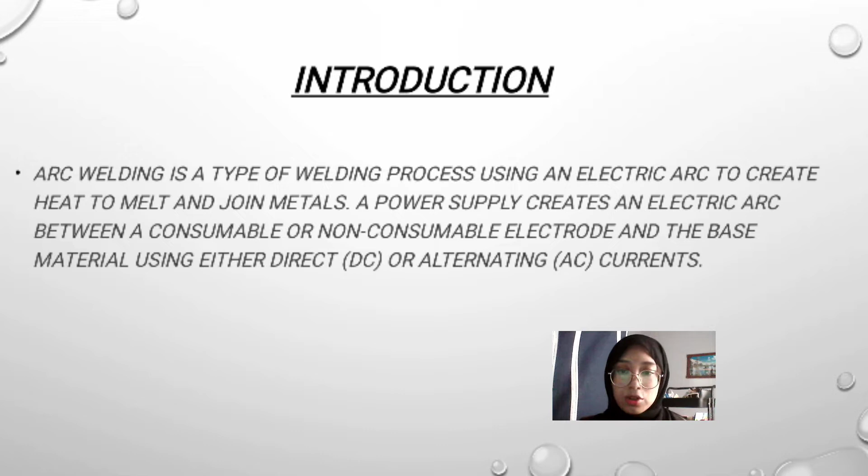This is a presentation on arc welding. Introduction: arc welding is a type of welding process using an electric arc to create heat to melt and join metals. A power supply creates an electric arc between a consumable or non-consumable electrode and the base material using either direct DC or alternating AC currents.

Objectives: to perform welding techniques and understand the importance of arc welding; to define the problems that occur in arc welding; to recognize the type of metal, electrode, and tools used in arc welding; to recognize the types of arc welding and the steps to create arc welding; and to know the safety measures when using the welding machine during the welding process.

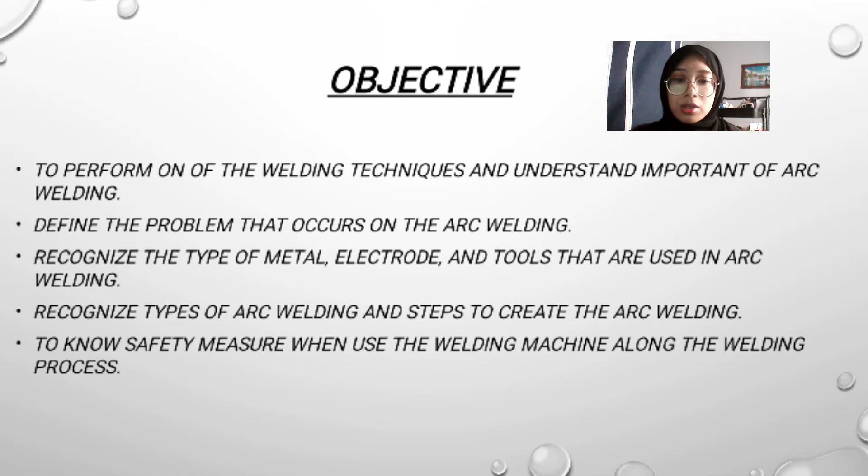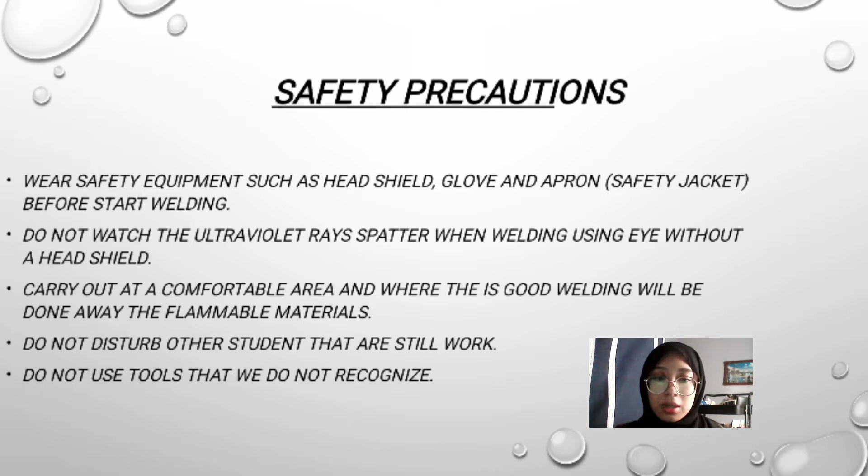Safety precautions: wear safety equipment such as head shield, gloves, apron, and safety jacket before starting welding. Do not watch the ultraviolet rays spatter when welding; make sure to use a head shield to cover your eyes. Carry out welding in a comfortable area away from flammable material. Do not disturb other students who are still working. Do not use tools that you do not recognize.

Today I am going to talk about the work procedures of arc welding. First, cut the iron rod into 10 cm pieces and each student gets two pieces of it.

Clean the surface of the metal plate with a wire brush before welding. Mark the point where you wish to begin your weld on the metal plate. Select the appropriate electrode for the type of work. Adjust the electrical current between the electrodes as suitable for the particular size, around 80 to 90.

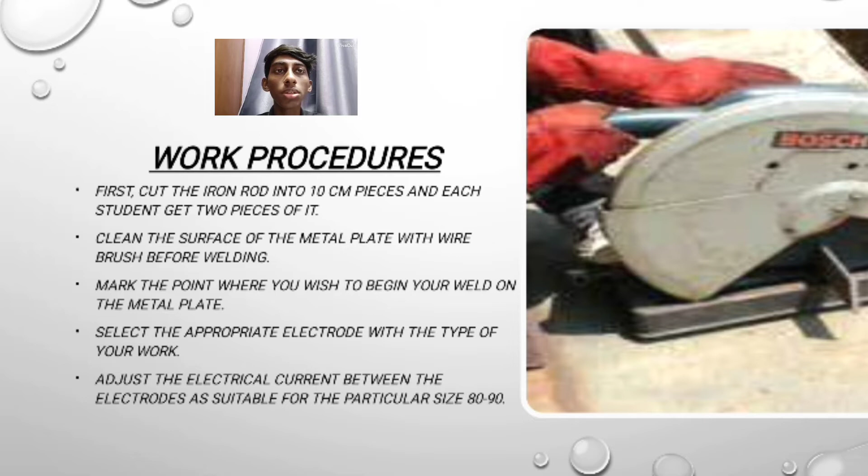Welding on a flat surface, the angle between the electrode and the workpiece is between 15 to 30 degrees. The metal plate has two surfaces: on one surface do a welding line in 3 lines, while on the other surface do a welding weave in 3 lines also.

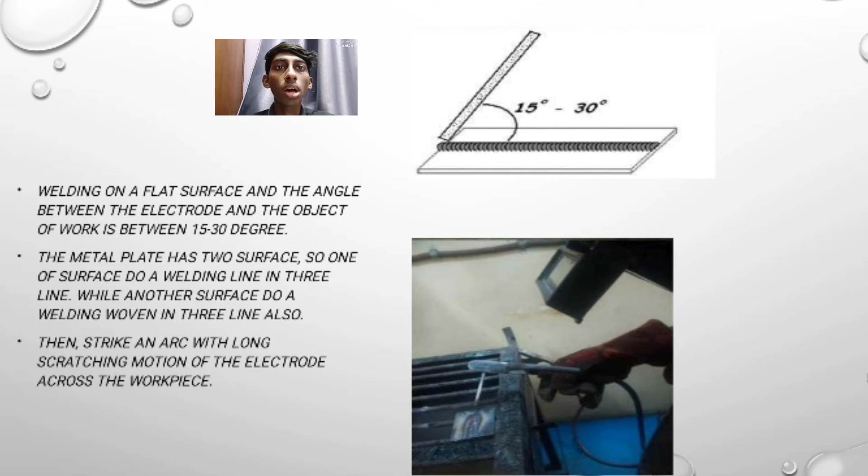Then strike an arc with a long scratching motion of the electrode across the workpiece. Finally, after the weld, quickly lift the electrode away from the workpiece. The electrode is dropped from the holder and put down the electrode holder. Wearing the clear shield on the welding helmet, chip away the slag on the weld bead.

After completing all of the above processes, make sure to tidy up your work table.

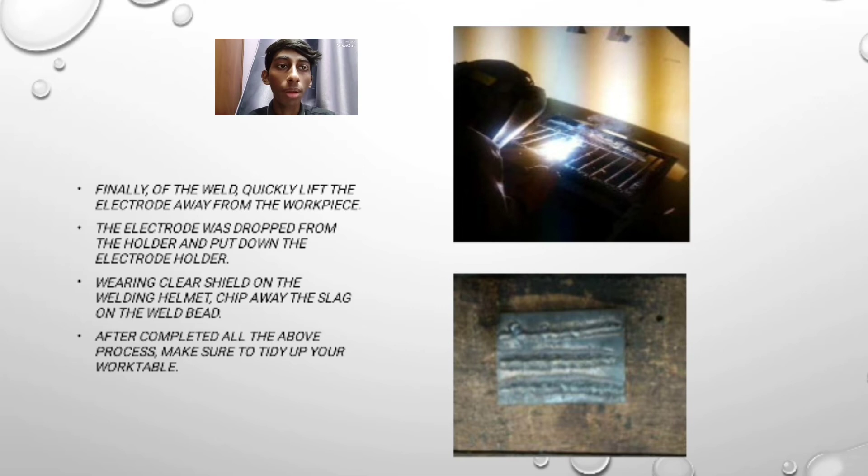Discussion: in my work, by using high current, the electrode melts faster and the molten pool becomes excessively large and irregular. It will also leave a groove in the base metal along both sides of the weld, and therefore undercut will occur. Effects of high current: spatter occurs in large drops alongside the weld; the bead is too wide, too thin, and undercut at the edge; the flux melts too rapidly and runs off the top of the weld.

If the current is too low, there is not enough heat to melt the base metal and the molten pool will be too small. Effects of low current during welding: inadequate penetration or a weak weld; difficulty in striking the arc; the arc goes out often, causing difficulty in maintaining the arc.

From my welding techniques, the speed that I used was too fast. As a result, the molten pool was thin and irregular. This also led to lack of penetration, where shallow fusion happens between the weld metal and the base metal.

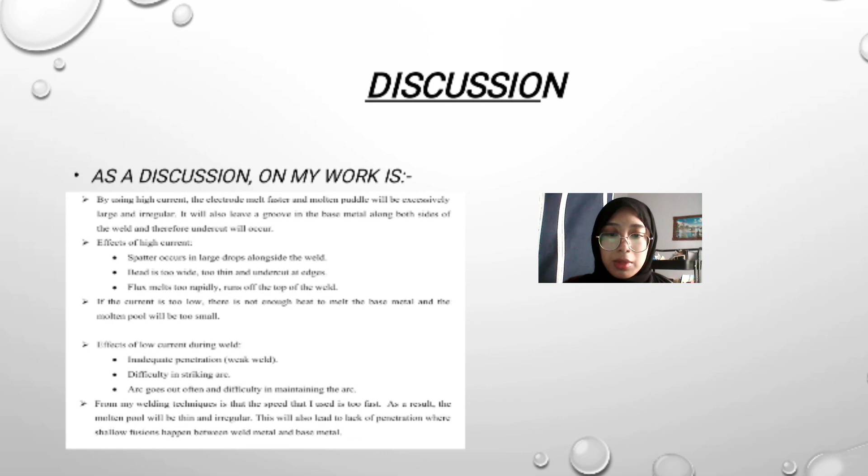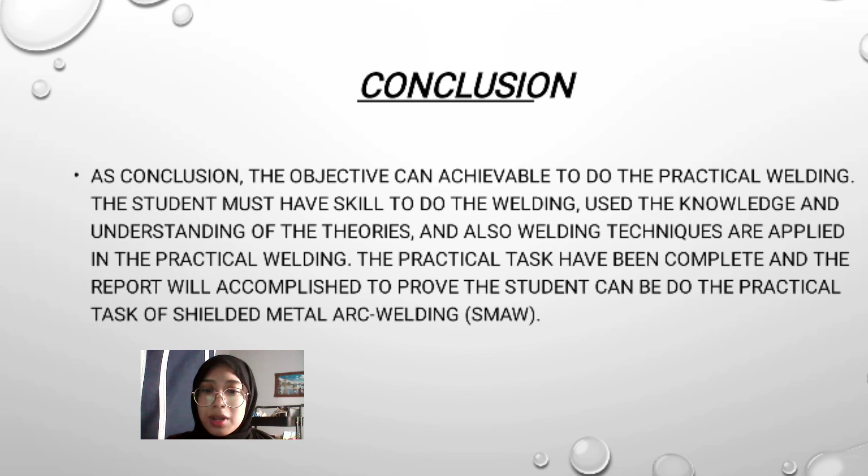Conclusion: the objective was achieved in doing the practical welding. The student must have the skill to do the welding, use the knowledge and understanding of the theories, and apply welding techniques in the practical welding. The practical tasks have been completed and the report will be accomplished to prove the student can do the practical task of shielded metal arc welding.